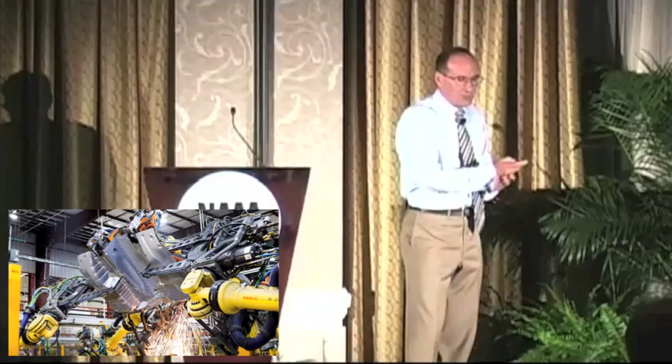We're seeing common platforms. This is nothing new, but more of them. The VW mega platform was going to be a basis for at least 1 million cars. They won't look the same, they won't be owned by similar people, they'll go in different directions with different customer experience, but look beneath the bonnet and you notice it's exactly the same car.

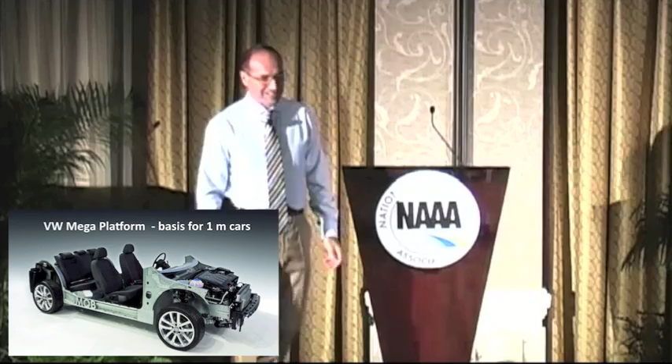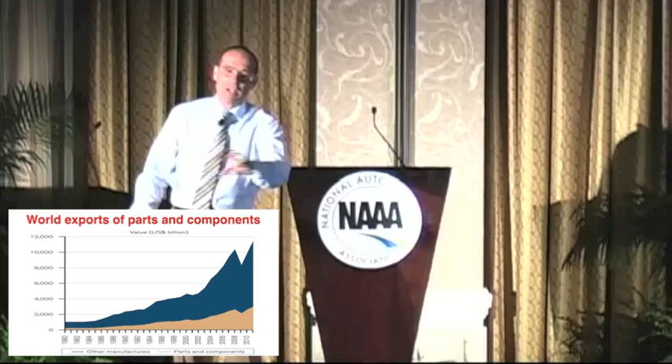At the same time, we're seeing all kinds of contractions of supply chains, so we're seeing regional hubs for manufacturing, huge growth in component trade. We're seeing parts and components moving around in particular regions and then being assembled together - a car built from pieces from around Asia into a car that's made in China to be sold in Vietnam.

Now, at the same time, which is good news for America, jobs are coming home - all kinds of manufacturing jobs coming back. Why? Because China is so incredibly expensive. Last year, prices in China were 12% more expensive. That's a lot difference. So if you have outsourced some jobs to China, in 2 years they're 24% more expensive than 24 months earlier. Now, you go another year or two like that, and you have pushed a huge amount of manufacturing out of business.

So Mexico is now competitive. Actually, the UK is now competitive compared to Poland. Poland's competitive compared to China. It's changing very, very fast. It's a very disruptive process bringing all these jobs back home.

And we're seeing manufacturers doing all kinds of extraordinary inventive things. They just hacked 40% of the weight out of a Land Rover.

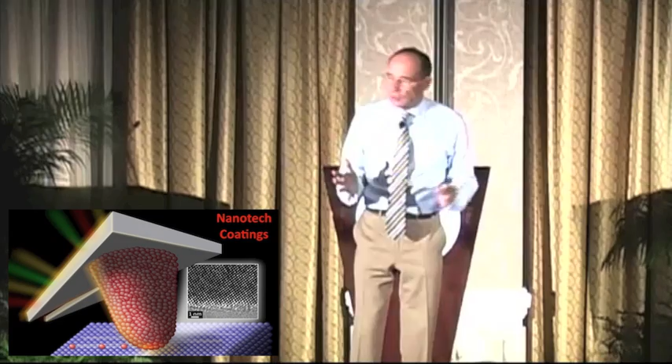And nanotech coatings are here already. We were just talking earlier about nanotech paint coatings which are self-clean - hopefully won't need any washing for 10 years. I'm not sure I actually believe it. You see, it takes 10 years to test, and they've only just brought it on the market, so you'll tell me the truth.

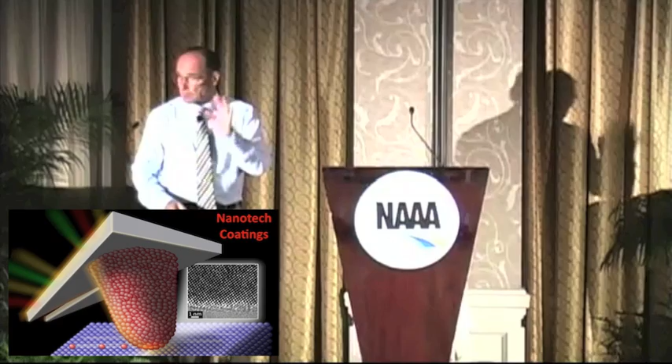But it will be different. It'll need less cleaning, for sure. The windscreens will be much better to look through, the optics will be tremendous. The fabrics will be air cleaning. My textile friends who are into clothing manufacturing are dreaming of new nanotech coatings on individual fibers, which means you just blow them with air to make them clean. Just think about how that would improve the inside of a car.

We're starting to see things like laser headlights come through, which give you 500 meters distance. We're going to see external airbags - people are experimenting with these kind of things, which are interesting because they protect the bodywork from all kinds of dents. We've already seen massive improvements in the energy efficiency of trucks, whether it's the aerodynamics, whether it's new kinds of tires, whether it's generating electric power for the aircon out of the suspension system.

A whole host of different things which we can do, I think, which will bring that down by a further 20% without any major miracles. Actually, by the way, the fastest way to improve efficiency for trucks is to fill them. 30% of all the trucks running across America are empty. I don't know how that affects you in terms of auto transport, but I wonder how many journeys are made with...

Big vehicles carrying 10, 15, 20 other vehicles on them, where in one direction they're almost empty. It's a massive business opportunity for someone.

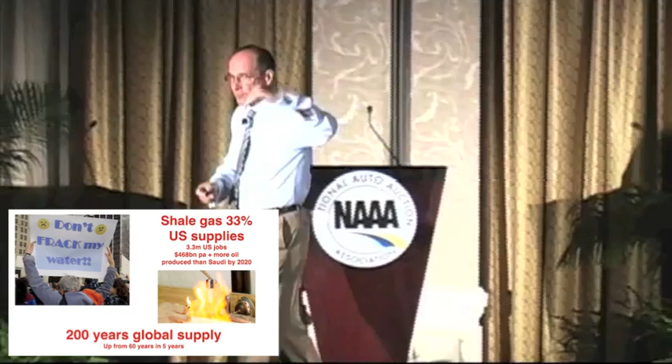Firstly, let's have a look at gas. You see, the shale gas explosion has meant that reserves of gas proven in the world have improved from just 60 years, 5 years ago, to 200 years in just 60 months. It's incredible what's happened. And as gas supplies have dropped towards zero in cost per cubic meter, all kinds of people have started to think about using gas to power vehicles.

And in places like India, they already are. The air pollution was so vast that the Indian government decided to pass a regulation forcing every taxi and all the buses and so on to convert to compressed natural gas, and overnight the air cleared.

But gas, I don't see that as becoming the number 1 fuel of the future. I really don't. I think we'll see experiments with it. The trouble with it is that it's bulky, and that we don't have the infrastructure to run it around through all the places where you'd normally buy gasoline or diesel. The same goes for hydrogen.

Yes, we're seeing all kinds of stories which sound amazing. It's wonderful to think of a car that emits just water. Great, fantastic. Hydrogen, oxygen, just steam.

But hydrogen is really expensive to move across the United States of America. It's really costly, an absolute fortune. Hydrogen is a very tiny molecule, very difficult to contain. You have the smallest leak in a pipe, it will find its way through.

It's a bit like helium. I don't know if you remember as a child, or with your children, you blow up helium balloons. It's hard to keep the helium in the balloon, right? However tight you get it, the helium will find a way out of that tiny hole. You fill it up with ordinary air, it'll stay inflated for months.

So hydrogen is a challenge, and it doesn't mean that cars aren't being developed to use them, and we're seeing big improvements in hydrogen fuel cell efficiency just in the last couple of years. But am I a great believer that the whole world's going to run on hydrogen? No, I don't think so.

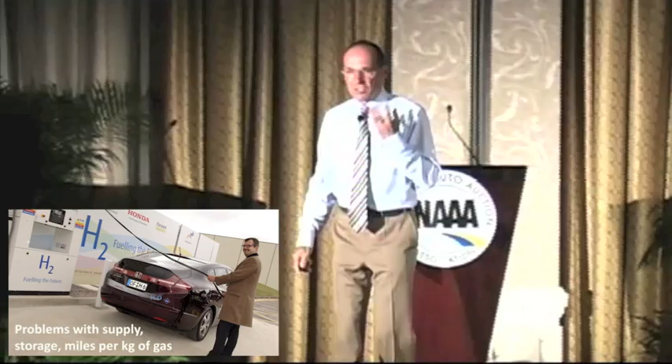So unless people are going to resign themselves to having no luggage in the back and no spare tires—I'm exaggerating a little bit, of course—but frankly, hydrogen has challenges.

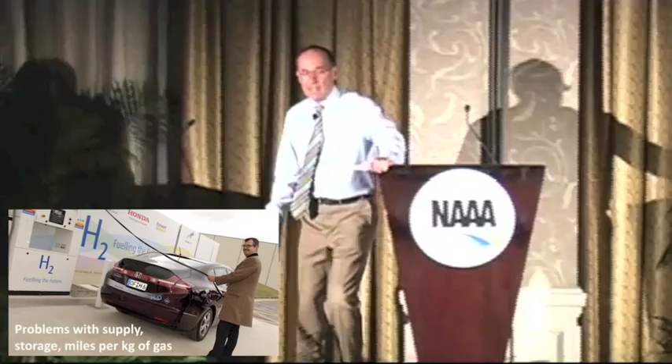So it won't stop people from losing a lot of money on hydrogen experiments. Why? Because these manufacturers are having nightmares. They're having nightmares that one of these technologies is going to win and kick them sideways, and they won't be ready. So you're seeing them experiment with lots of things that fundamentally they're not quite sure they believe in, but they'll just do it, and they'll confuse all your options in the process, but never mind.

And here's another thing: okay, let's clean up oil, let's say. Let's have bio-oil—biodiesel, biogasoline. That's great. The only challenge is no one did the math.

You have to use every gram, every kilogram of grain grown in the entire United States of America to drive the trucks and all the auto industry for about 25% of the miles it drives each year. And there will be no food left to eat.

And as it is, with just 5% of Europe's fuel going bio—I think it's 5 to 10% here—you know what? We already produced food price spikes around the world of up to 70%, according to the UN. So I'm not sure this particular policy is going to fundamentally work.

We have to think differently. So then we move on to e-cars. And now we begin to understand why it is that car manufacturers have been putting so many tens of billions of dollars into one simple thing, which is the battery. The engines are simple—we've had the engines for years, and the technology is so easy.

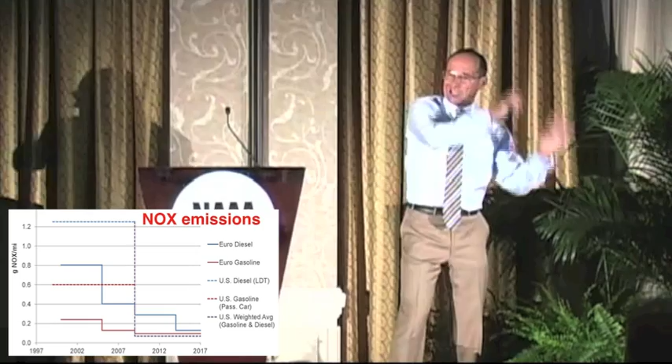Can we do it? Yes, we can. In the same way, we've seen NOx emissions for Euro diesel, gasoline, diesel. If you look at the US, if you look at the EU, look how dramatically these emissions controls have fallen. These regulations have become stricter in just a decade, and it was just at the beginning.

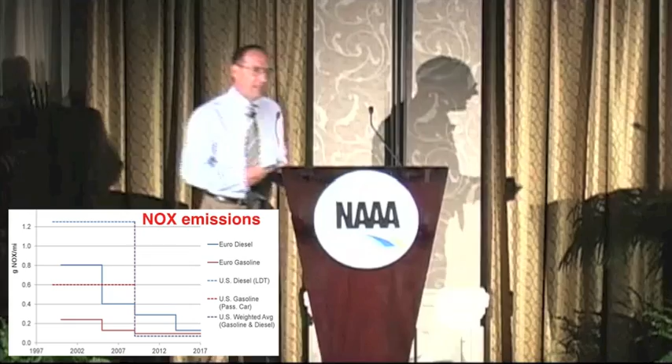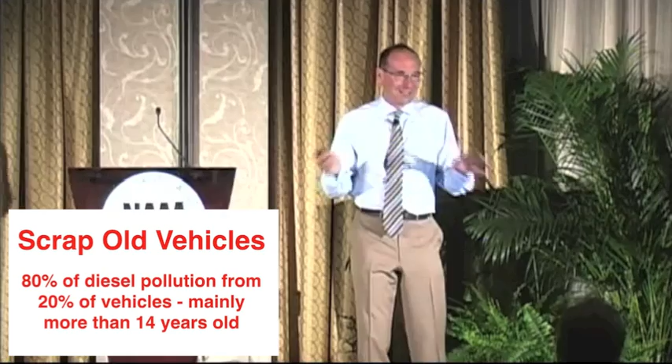By the way, if a country is really serious about cleaning up the air, all you need to do is take out the worst 20% of vehicles and be done with it. Really, the 20% of the monsters driving around, the old ones more than 10 or 15 years old, are doing nearly all of the environmental damage. But that's another question.

And VW's already done it. VW's got a latest hybrid, and it pumps out not 95 grams per kilometer, which is the EU standard today, but they've already got down to 21. And we've only just started.

So where does this lead us? Now, the hybrid story is really interesting. It's one that everybody gets their head around: okay, I've got a gasoline car, a diesel car, and it's got a bit of a battery. But the big question is, what is the point of having two entire propulsion systems? You just built the car twice. There's got to be extra cost there sometime.

How can we sort this out? Especially when you look at the data. You see, the data is interesting. Let's look at GM's own data for the Volt. They show that the average driver is using the battery 82% of the time, even with a range of only 38 miles on the battery. Now, if they could get the battery mileage up to even 50, that might get up to 95% of the time they don't need any kind of fuel except electricity.

And that means you might as well just plug it in. So we're not using carbon to power up the batteries at all. We're powering them up at home, and we're just using this monstrous additional piece of metal just for the extra 5% of miles we need to do. And then, of course, someone says, hey, but many people have got two cars anyway, so why would they want to use this car to go more than 50 miles without a top-up? And with the recharge being 80% in maybe one hour, what more do I need?

So that's just looking at today's batteries. What about tomorrow? Some people said, well, of course, the answer is we swap the batteries out. And there was another technological disaster and investment failure when companies decided in different parts of the world to put replacement batteries in gas stations. So basically, you get the vehicle for virtually free, and then you rent the battery as you go. You never own the battery. You just turn in at the station, swap the battery out, and away you carry on driving. Well, that's already died too.

So you can see that the poor old manufacturers are in a mess. They just don't know which way to turn because there's a battle between all these technologies, and things are getting overtaken by events. And in the meantime, there's this tricky thing called emotion triggering in, which means that even when it makes commercial sense, regulatory sense, we may find that regulators and consumers go somewhere different.

Now, I was one of the first people to own an electric vehicle. It was a G-Wiz, and it was in the early days when 70% of all the electric vehicles in the world were basically like a golf cart, tiny little things, fun to drive, at maximum speed about 45 miles an hour.

And if we look, therefore, at big predictions made, say, in Germany or by manufacturers like Nissan Leaf, then we can say that we're ahead of ourselves. I said to you, many of the debates about the future are not about what's going to happen, it's a question about when. And we can see, it's obvious, that the cost of battery technology is falling dramatically.

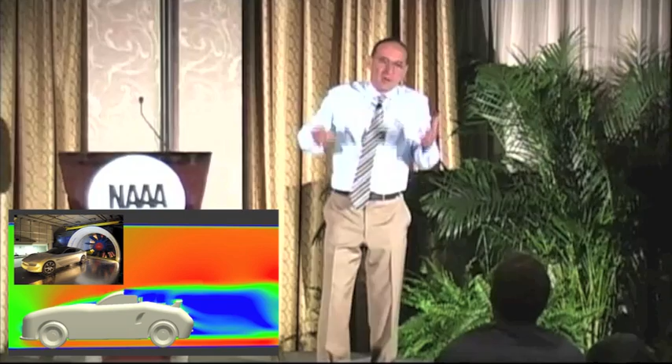And the other reason they will continue to look remarkably similar, which is kind of bad news - in the olden days, if you think about all the wonderful classic auctions you guys ran, the most beloved car that we've owned was a 40-year-old MG. I loved it to pieces until it kept on breaking down, sadly. But I loved it. Why? Because it was built as an act of beauty rather than by a computer in a wind tunnel.

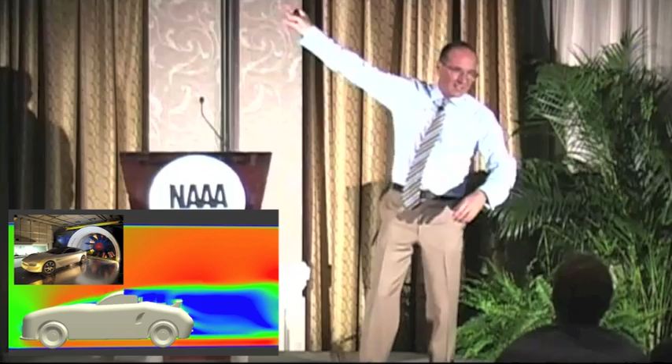But the other limitation is human beings. There are literally only so many ways - I can tell you as a physician, I'm a physician in my first life - I can tell you there are only a certain number of limited ways that I can contort your arms and legs and squeeze you into a metal box. Even if I make it a plastic box, you don't get changed. You are still the same shape, sadly.

And all human beings have got 2 arms, or nearly everyone, 2 legs, we've got hands, we've got a back that needs support, and we've got a head that needs safety devices. We are stuck with a seat, probably, unless you want to stand in your car to go to work. So that means that, strangely enough, the cars that you're going to be auto-auctioning in 35 years' time, your grandchildren are going to look at and say, hey, you know what?

It seems to me that for the last 30 years, we've seen very little change in shape, inside or outside, compared to the previous 30. We lost a few steering wheels along the way, but that's another story.

There's also, I suggest, quite a few limits to cockpit design. How many devices do you want in front of your eyes as you're driving along? The trend is probably it's all going to be on a mobile anyway. Everything you want will be heads up on the screen, whatever's on the mobile device. If it's heads up on the screen, there isn't anything on the dashboard. How last century it is to have lights and pieces of data flashing out of pieces of plastic.

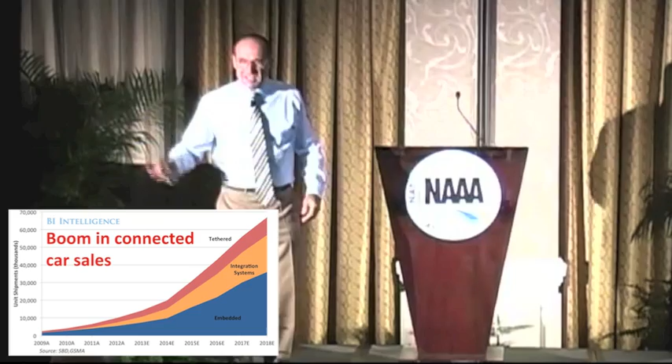A boom in connected car sales. Yes, every car goes online. Every car already is online, the new ones just about. It'll be impossible to buy a car that isn't online all the time. And with the online, there'll be a whole set of apps fixed to that manufacturer as they try to pretend that they are the iPhone of the future when it comes to cars. So you've got Chevrolet and Volvo and all the others. And meantime, you've got non-manufacturers trying to say, hey, you know what? Just buy the box, it's us that makes it cool.

So all they want from the car manufacturer is the iPhone plug-in socket, and let iPhone run it for you. Or let Google control your world. And this is a big issue. I promise you, those Google Auto teams are thinking of all kinds of strategies to make life really tough for manufacturers. And at the same time, all kinds of other interfaces offer advantages.

So we have insurance companies already in here, and in the UK, for instance, varying their premiums depending on how fast you drove home last night. We have companies varying insurance premiums each day depending on your driving habits over the previous 7 days. And they're keeping a log of each person who drives, which is the only way my son can afford to buy a car, because he's going to have telematics in the car, so he can prove that he's the safest 25-year-old in the United Kingdom.

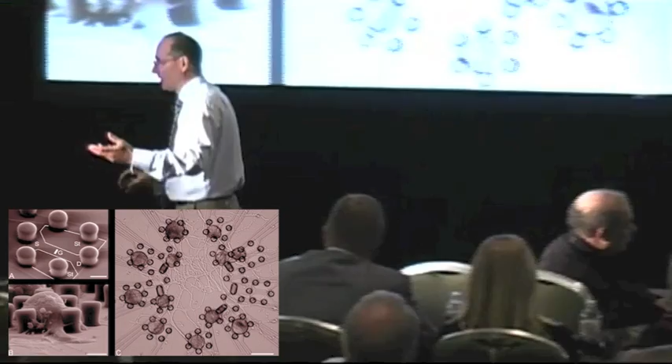What I really would like is a car that I can control, or rather control by thinking. Here is a human brain - these are human brain cells growing onto the surface of a chip. In fact, your brain cells are programmed genetically to communicate with computers. Did you know that? I can take a sample of your brain tissue, grow it in the laboratory, and grow it onto the surface of a chip, and those brain cells recognize an electrical surface and grow into it. They communicate with each other, they communicate with the chip, and they start transmitting and receiving data. We've been doing this for years in mice and rats, and it works quite well.

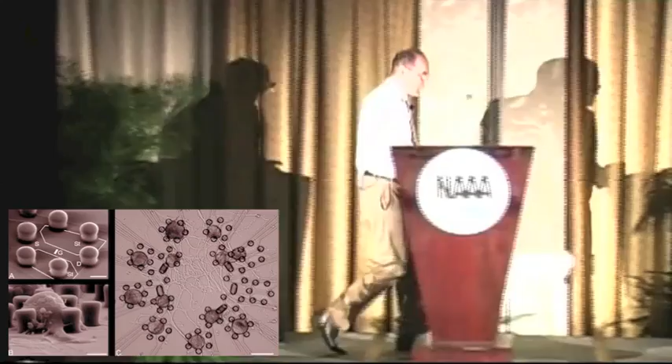Just recently, we had the first virtual communication between two human beings who sent a thought at the speed of light over a number of kilometers from one brain to the other, without anything else being involved at all. Now put up your hands if you'd like to have such a device implanted inside your brain. Put your hands up if you are definitely sure that your children should not have such things, or your grandchildren.

Okay? You see, the future is not about innovation, is it? It's about emotion. It's about how these things actually connect with us, which is what we're going to look at some more after coffee. But I just want to come back to this.

Who owns the driver? You see, this is what it's all about. This is the heart of the manufacturing nightmare right now. I can tell you, every boardroom, they're worried about this. Is it you guys when you sell a car? Is it the person who sold them the car in the first place? Is it the telco company? Is it the software company? Is it Google? Is it iPhone?

Is it the independent garage network? Is it the leasing company? Is it the software provider? What is it? I'll tell you one thing.

The manufacturers want these people out. They say, well, at least take these ones out. We don't want them to own the driver. Let's get rid of them. And we can control that by making the vehicle so complicated that it is impossible to diagnose a fault without using our plug-in equipment, right?

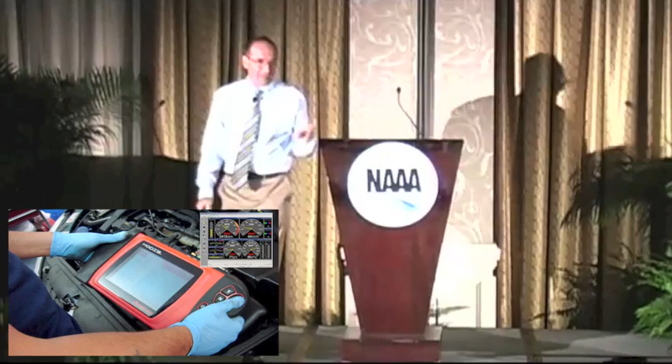And you know exactly what this is about because you have this problem every single day trying to sort out problems in vehicles, and you have all the testing kits, and this is going to become even tougher. They want control of the whole of the diagnostic process. They want from the moment the vehicle is sold right through to the day it's scrapped, total diagnostic power.

They want to detect every fault before you've even seen the vehicle. While it's still in the car, before it's even been auctioned, they want that fault data going back to them through wireless networks. They want to diagnose it. They want to capture it. They want to insist that their dealer has already intervened to sort it out with their proprietary copyright-protected materials and so on.

This is a complete stitch-up that they want from start to finish, but you're going to see a real fight back to stop it. Auto dealers, of course, get caught up in the middle of all of that. And we have people like Tesla who've decided they don't need dealers at all.

That's interesting. Now, I just want to go back to energy because energy will take us full circle back to cars. We're looking at a $40 trillion spend in green tech over the next 30 or 40 years. Now we're back to the shale gas story. Just look how the price of gas went from boom to bust in just a very few years.

That meant that last year, 57 coal-fired power stations closed in the US. That meant there was a glut of coal, which means my Vietnamese friends are building huge coal-fired power stations to absorb all the spare coal around the world because of things like shale.

In the meantime, we have enough power in the Nevada desert to power the whole of America from just about 50 to 70 kilometers by 20 kilometers of desert. We can move that power 5,000 or 6,000 kilometers without hardly any power loss using the latest technology.

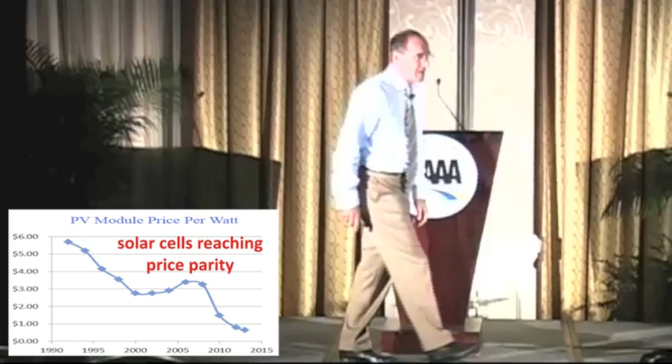This is computer chip manufacturing all over again. That's all these are, silicon wafers that react to light. We'll see those costs falling so low that you'll find the cheapest way to roof your house will be to use them. The cheapest way to put walls on buildings is to use them. The cheapest way to cover a car park is to use them. You're going to see them everywhere.

At the same time, we're seeing an explosion of wind power on a scale that is totally breathtaking. The UK alone will have 30% of its power generated from wind very soon. And when you look at peak power, say in Boston, or Miami, or Sydney, we see a big challenge, which is you have about 4 really hot days a year when you need all this reserve power. Most of the time, it's wasted.

So just look at this. Peak electricity cost in Australia leaps from, say, $50 per megawatt hour up to $10,000 a megawatt hour for just 72 hours a year. I tell you, if you've got a kilowatt you can donate into the grid at that point, you'll make a fortune.

And I've got good news for you. On your car lots, you might have a lot. I'll come to that. You see, look what happened in Germany. In Germany last June, not this June, but the one before, there was so much wind one day and so much solar power, and there have been so many of these panels and turbines put up that the grid started to burn up.

They couldn't get rid of the power fast enough. So the electricity companies were phoning up all the biggest manufacturers saying, how many aircon units can you turn on in the next 10 minutes? Just turn on everything you've got. I want you to heat the place and cool it at the same time. Every electric heater, every light bulb, every robot, just turn it on. It was a national emergency.

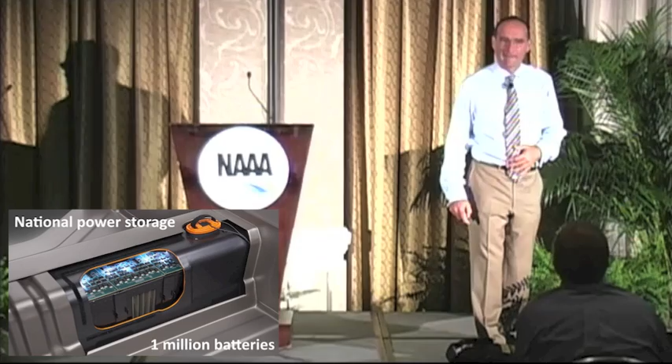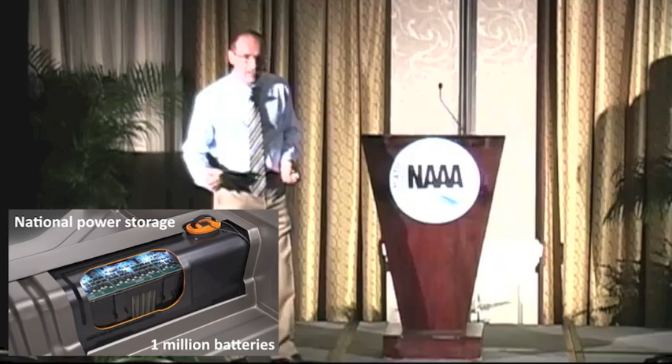Just imagine a world where we've got maybe 1 million, 2 million, 3 million e-vehicles, and these cars are hardly used. They drive from A to B, but when they've arrived there, they're plugged in. And when they get home, they're plugged in. So they're sitting there as a free store of power for anyone.

So when the power stations are running at night, or when there's lots of wind or solar, we tank everyone up. And when there's a bit of a crisis, we take a bit out. When everybody turns on their electric kettles because the latest episode of whatever it is has just finished on TV, we turn them back on again.

And we can adjust, we can put regulations on it so we don't take more than 3% of the power from any car, from any battery. We never pull any battery down that isn't already 98% charged. Or we don't pull down a battery of a car that we know is going out tomorrow, because remember, the car knows your diary. But we can do these things.

So in conclusion, and then we'll go into break, and then we'll look at how consumers are shifting in response to these things. What's the message? The message is that I can't remember a time in human history, perhaps only repeated by the first years of the combustion engine, when there's been so much innovation, so much radical experimenting going on to try, in particular, to develop new powertrains for vehicles. And so much confusion as well about which systems are going to win.

But I suspect that when all that dust has settled, and you meet at the National Auto Auctions Convention of the United States of America in 20 years' time, and we look back at what happened, what we'll find is this: gasoline, still a really great fuel. It's powering huge numbers of cars. It's unbelievably efficient, with nanotech coatings on every moving part that in itself immediately produced another 5 to 10% energy efficiency, and so on.